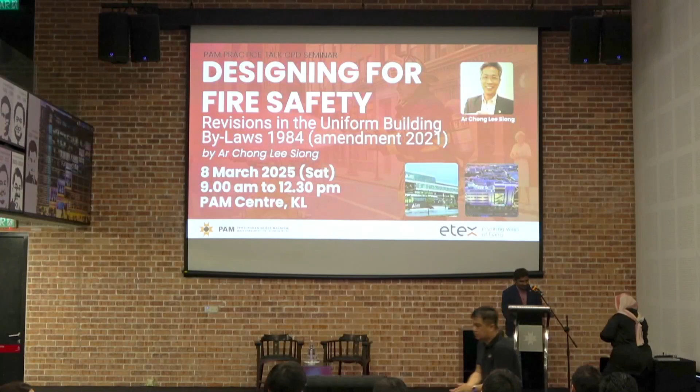Thank you, Azim. Okay, this is always a bit too tall for me. Okay, to start with, to the ladies out there, Happy International Women's Day. To all women attending this event today, thank you for spending your Saturday morning instead of, we can't say celebrating, right? We can't, after Buka Puasa lah maybe. So, but you guys spend your time today in PAM Center, so thank you so much.

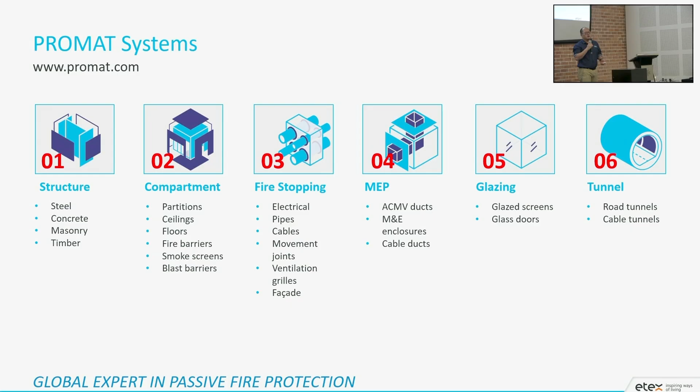Nowadays, steel structure is getting more and more common. We provide protection to the structures, to the concrete, and to the timber as well, although not so much in Malaysia. Then compartmentation - very simple fire rated partition, ceiling, and flooring, not so much, but also on the vertical fire barriers and horizontal fire barriers. Then fire stopping, for all those services passing through the compartments. We also need to treat all these penetration points because when services pass through, it leaves a gap, holes, and so on, so we need to look into it. If not, it will compromise fire protection and fire can easily spread through. And of course, M&E enclosure, ducting, cables, and so on.

So a quick one on the structural protection. When it comes to structural steel protection, we have different technology, different protection methods, from intumescent paint to the vermiculite spray and also board encasement. Each of these comes with their own pros and cons, depending on the project requirement, what is required, then we will propose accordingly.

Intumescent paint basically is up to 3 hours fire rating. It's the most aesthetic one, it's thin and easy to apply. Then vermiculite basically is the most economical option, ideal for large areas, but the surface is a bit textured. If you have time later on, you can visit our booth outside and see the difference between the board encasement, the vermiculite spray, and the intumescent paint.

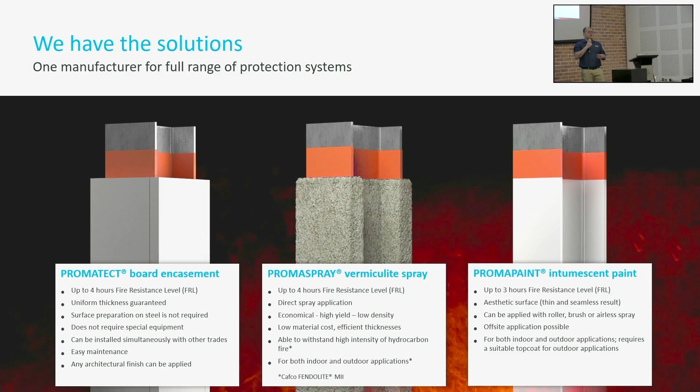In terms of the board encasement, it requires less skilled workers because the board is already pre-manufactured. It comes with uniform thickness. You can just cut, clad, and in terms of decoration, it can perfectly match the adjacent material.

And the last one, on the far right, is the intumescent paint. It basically maintains the steel look. So for those where aesthetic is critical, where you need to maintain the steel look, intumescent paint is the preferred option.

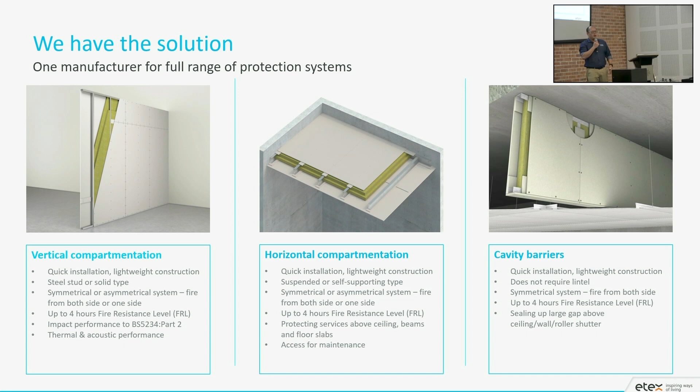So coming into the compartmentation format, we basically offer vertical and horizontal separation - vertical compartmentation, horizontal compartmentation, and also cavity barriers. In terms of the vertical separation for vertical compartmentation, we have different types of design, depending on the project requirement, what is needed, and then we propose accordingly.

From very general, which is very common - steel stud partition, where we build a steel stud framing, put in the mineral wool infill, and clad with fire protective board on both sides. So it's a symmetrical design where you protect against fire from both sides. The fire protection rating is up to 4 hours.

Then other than that, we also have the solid partition, which is a slim design, for when you require one side installation. By having 50mm thickness, it can fulfill 2 hours integrity and also insulation criteria. So it's much slimmer compared to the common steel stud partition.

And of course we have this high performance Durasteel fire and blast wall. It comes with up to 4 hours fire rating, and at the same time it also provides blast resistance up to 2 bar. So for those critical areas where you want to protect critical infrastructure, equipment, and so on, this is basically the preference for that.

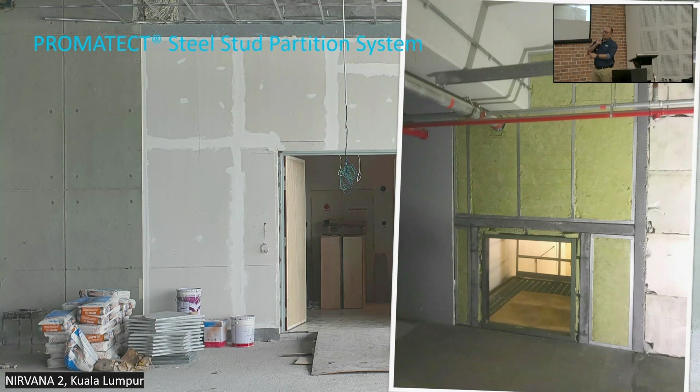So Nirvana for the lift lobby with the steel stud partition - basically it's just a steel stud with mineral infill, then clad with fire protective board, and solid partitions. You can see how narrow the space is, where you can only install from one side. This one is actually for 1 hour fire rating. With 35mm you can achieve 1 hour, 50mm for 2 hours, and 75mm for 4 hours.

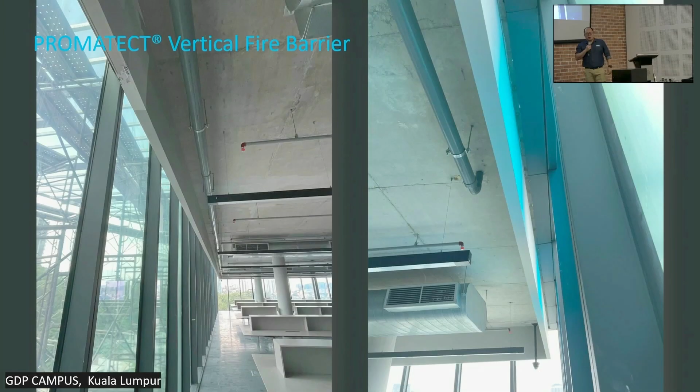Of course, I'm not sure if there's any GDP architect here. Thanks for the support. So this is actually the vertical fire barrier for the GDP campus. This one basically is to tackle bylaw 149 for the fire barrier along the building perimeters.

Then when it comes to horizontal compartmentation, we also have various designs, from the very common suspended ceiling where you need to have the suspended framing fixed to the soffit or to the structural beams. Normally this design is to protect from fire from below. It's an asymmetrical design, but it's ideal for a large ceiling area because there is no limitation on the ceiling span.

Then we also have another system called self-supporting ceiling. It by itself is self-supported. So normally when you have a big, tall floor-to-ceiling height, then you want to subdivide to protect from fire from above and below. So normally when services are passing through and you want to protect them, for example in the lobby, this is the ideal solution where it's fixed from wall to wall.

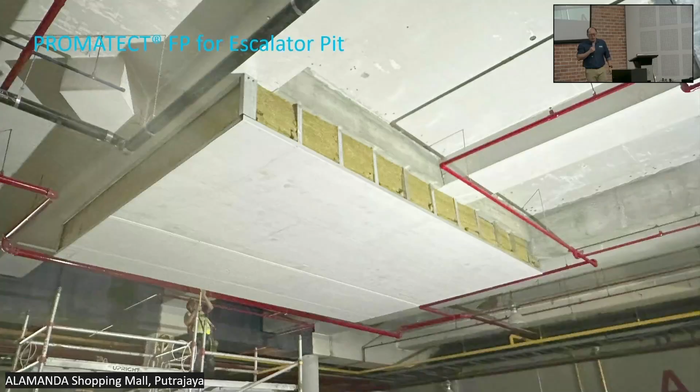So it comes to the fire stopping part. Fire stopping, although not so relevant to architects, is also part of the scope in terms of passive. So I will touch a bit on that. Depending on what kind of services, the type of cables, the type of pipe material, whether it's metal or plastic, the type of plastic, we have different solutions and treatments. So for linear joints, penetration seals, and so on, depending on the requirements, whether you want a permanent fix or temporary fix.

And I would like to take some time to share on this IMC box. It is for cable penetrations. Normally, the traditional way is you need to remove the fire stopping in order to add or remove cables for retrofitting. But with this system, you don't need to remove the fire stopping, and you can just add or remove the cable. It comes with a pipe sleeve, and inside there are flaps where you can insert or remove the cables. If you are interested, we also have a sample out there. You can have a look at that.

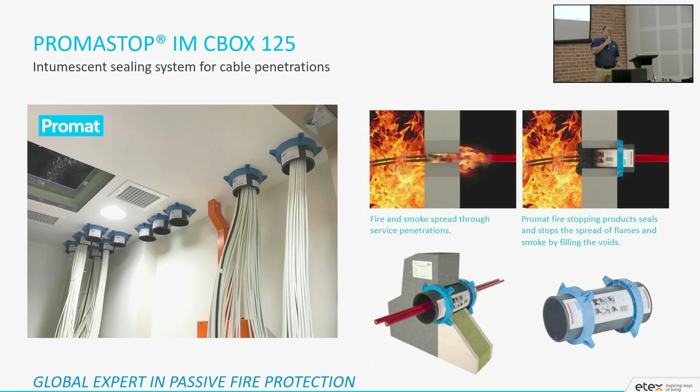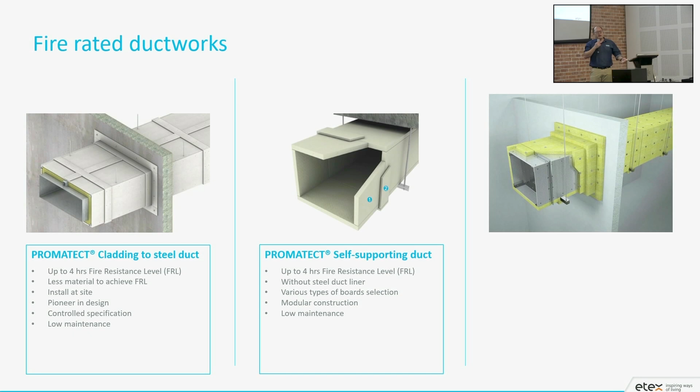So the last part would be on the M&E protection enclosure. Same, we have different types of design. Either we clad the steel duct, or we build the duct itself without any steel liner, just with our fire protective board.

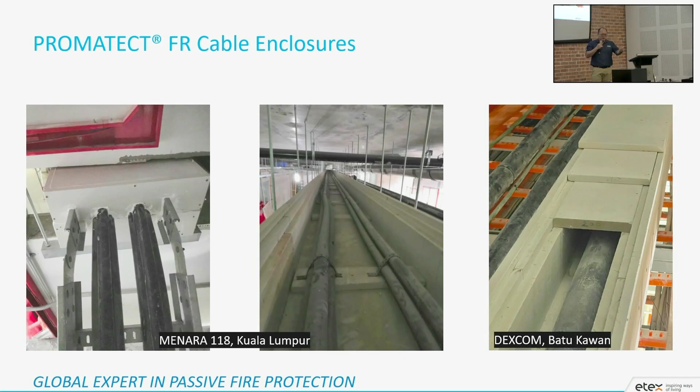Of course, when it comes to a critical service, some of the services when you need to protect, to maintain the fire compartment, we have that solution as well. For example, for cable enclosure, for Menara 118, for DEXCOM, this is the project reference. And yeah, for PayNet, a Durasteel cable enclosure.

We will now proceed with the paper presentation, but first, please allow me to read out a brief biography of our invited speaker today. Architect Chong Lee Siong holds a Bachelor of Arts in Architecture and a Bachelor in Architecture Honours from Deakin University. He served as a council member of Pertubuhan Akitek Malaysia, PAM, holding key roles such as honorary secretary in the year 2006 to 2007, and vice president from 2007 to 2008, and contributed to various committees, including CPD and building standards. An expert in fire safety engineering, he played a role in drafting the Uniform Building Bylaws 2012 and co-authored the Guide to Fire Protection in Malaysia. He has lectured at multiple universities and examined architecture programs.

Thank you so much. Okay. I'll be using this mic, huh? Yeah. Okay, thank you. No, I think it should be all right. All right. Thank you and good morning.

I apologize. I've actually changed the title of the talk today. What's happened is that the original title that I'm meant to deliver is supposed to be on the revisions in the UBBL 2021, highlighting it. But I'm sure some of you may have already gone through a few of my previous sessions on the same topic, revisions on the Uniform Building Bylaws 2021, and we realized that 2 hours is not enough. If I'm to go through it, sometimes it takes up 3 days or 4 days, and we'll never ever finish. And if I give an introduction, you'll just raise more questions, and then I won't be able to go home after that because we'll all be crowding around and having an after-seminar session.

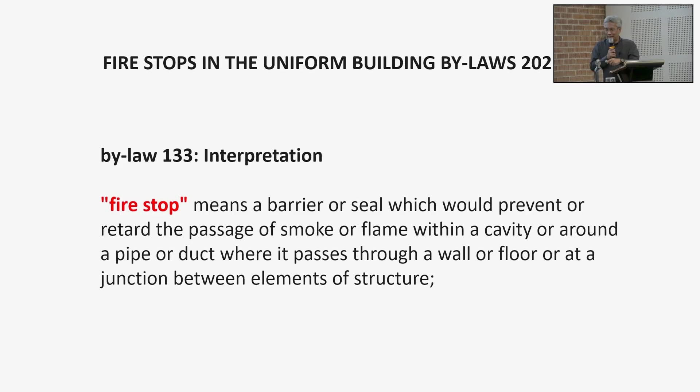So in the Uniform Building Bylaws, Bylaw 133, fire stop means a barrier or seal which would prevent or retard the passage of smoke or flame within the cavity or around a pipe or duct where it passes through the wall or floor at the junction between elements of structure. This is verbatim from the UBBL, so you don't have to take a photograph. It is just a verbatim extraction of the clause on the fire stop.

Okay, where is a fire stop required? UBBL 141 talks about separating walls. No opening shall be made in any separating wall which forms a complete vertical wall separating any building. So generally, no opening shall be formed in a separating wall. But nothing in this bylaw says that you cannot have anything going through a separating wall. It just says it shall have no opening, because a separating wall, by inference, is an element of structure, so it requires fire rating for the prevention of fire spread. But it does allow passage of things through the wall.

On the basis of the prescriptive code, you are not allowed to have a flue pipe going through a separating wall. But if you have a pipe going through, if the pipe is made of combustible material, it shall not be larger than 25 millimeter diameter. So if you have a PVC pipe at 25 mm, when it burns, hopefully the 25 mm hole left behind will not cause too much damage, and maybe the PVC will melt and help seal the gap. But this is purely prescription. The bylaw is not performance-based. It just sets certain limitations.

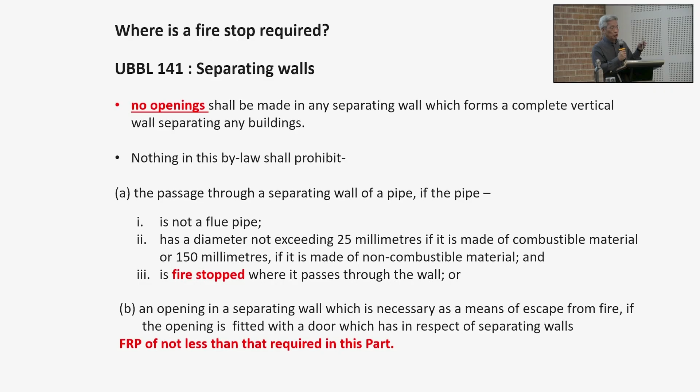So if you put a door leaf in that wall, then obviously the door leaf must be of the same integrity as the wall that you're going through. So that has to be the basis. So take away that half fire rating thingy for doors for now. Just take it away. That one comes in only for certain applications, which I will mention later. Right? So it is always full fire rating, fully in compliance with the integrity that's expected of the wall.

Okay, then still, where is fire stop required? Now we have compartment floors and compartment walls. Just now was separating wall. I do have another session on the difference between party wall, compartment wall, and separating wall, but that's another session. For now, it's separating wall, now compartment walls. These are all references direct to the UBBL.

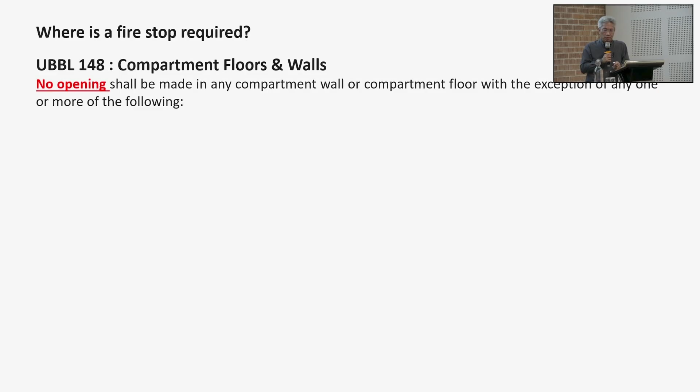No opening shall be made in any compartment wall or compartment floor with the exception of any one or more of the following. An opening for a ventilation duct, other than a duct consisting of a protected shaft, if any space surrounding the duct is fire stopped and the duct is fitted with an automatic fire damper. Right? And again, the fire damper or whatever assembly is going through the wall shall have not less than the required FRP of the wall that you're going through.

That means any opening going through the wall shall not in any way diminish the integrity of the wall. And where a compartment wall forms a junction, etc., then it needs to be fire stopped. In other words, a compartment wall or floor shall function fully as a compartment. Any openings, sleeves, pipes or anything that you're penetrating through shall not be a reason for the wall to have a lesser integrity. Right? Okay, so that is the key criteria of a fire stop.

UBBL 161. So we do actually have a specific clause in the UBBL talking about fire stops, and this is where it is. 161: Any fire stop required by the provisions of this part shall be so formed and positioned as to prevent or retard the passage of flame. That is verbatim. And any fire stop shall, if provided around a pipe or duct or in a cavity, be made of a non-combustible material. Obviously, it has to be non-combustible. Okay. But this is prescriptive code speaking here.

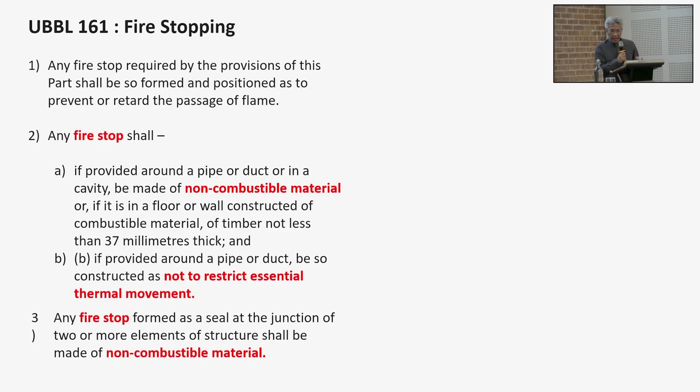So, any fire stop formed as a seal at the junction of two or more elements of structure shall be made of non-combustible materials. Again, it's prescriptive code. Of course, it's understood that it has to be of a non-combustible material.

And any cavity in an element of structure which is continuous through the whole or part of such element and has a surface of combustible material exposed to the cavity lower than class O shall be fire stopped. This little clause over here is probably a little bit redundant now because all of these references are now superseded or taken over by all references to BS 8414.

When we have cladding, when we have cavity on the external walls and all that, the standards of BS 8414 in a way override this already. But this one will still be applicable if you're doing a building that does not necessarily need to be in compliance with BS 8414. Now, this is an element that would still be applicable, right? Fire stopping in cavities, in elements of structure.

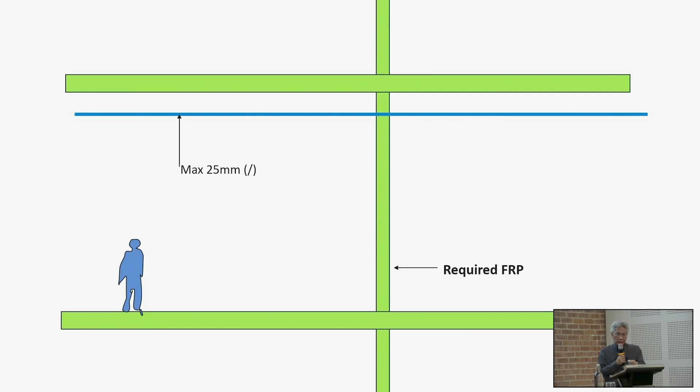Right, so all these are the prescriptions. And again, any junctions forming the compartment shall be fire stopped, similarly. Diagrammatically speaking, this is how we summarize it. If the green elements are the elements of structure that require fire stopping, if you have a combustible pipe going through, maximum is 25 millimeters diameter. And if you have a non-combustible pipe going through, maximum diameter shall be 150 millimeters.

And between the outer surface and the inner surface of the opening, it shall be fire stopped. Right? That means there shall be no air gaps going through. So in this case, what we are saying is that we are relying entirely on the integrity of the pipe going through to prevent the fire from going through the cavity of the pipe.

Right? In the case of the combustible one, you're hoping that 25 mm, if a cavity does occur, should not cause too much trouble. And in the case of a non-combustible pipe, you think that it should be able to last in a fire for the duration that you require it without melting or breaking down.

Now, what if you have a duct? If you have a duct going through, then we need to have the fire stopping on the automatic dampers, or, I've just noticed there's the grill. They've got the intumescent grille. I do not know how we can apply that one yet in terms of its performance and criteria, but it's definitely an interesting element. Because again, fire dampers are specified by our engineers, you see. So we almost have no control.

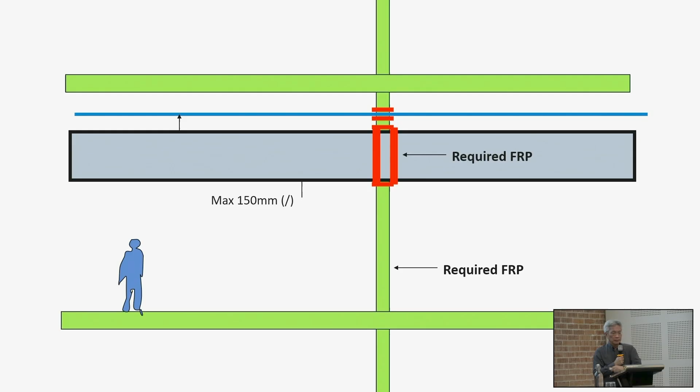But what if this duct happens to be actually your smoke extraction? The last thing you want is for the smoke extraction duct to have the dampers closing. Then you've lost a very critical element of fire safety. So if the duct has to be fully functional at all times, then you can't use dampers. You'll then have to do a full enclosure of the duct over the entire length, fire rating it. Right? So then you can remove the dampers and you have a full fire rating.

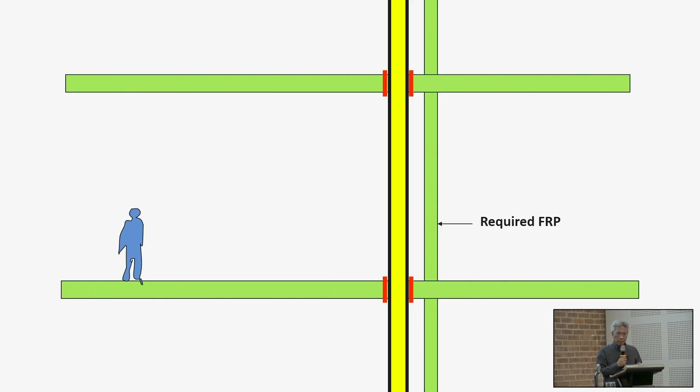Right. So another example, this is for vertical penetration, or rather penetration through horizontal elements. Again, exactly the same thing applies. And if you turn this into a shaft, or you turn it into a ducted riser where you put a door in there, now this is where the half required FRP comes in.

See, the elements of structure, the bylaw is prescriptive, it's very, very clear. Once FRP is prescribed for your building in accordance to size and volume and function and purpose group, it's to be applied to all elements of structure. So all elements of structure is, of course, all your structures, floors, walls, columns, compartment walls, compartment floors, everything that's regarded as an element of structure in the bylaw description.

However, where it is not an element of structure but you require it for fire rating, particularly in a sense like this, you may - it's not that you must - have the FRP reduced to half, and in any case no less than half an hour. So if it's a 1 hour wall, you don't reduce it to less than half an hour. But I'll come to that a bit later.

But generally, the purpose of this is this element - I'm supposed to point it at the screen down there. So this element is not an element of structure, but you are putting it there because you're demarcating... I'm not too sure, am I supposed to point it there or there? Okay.

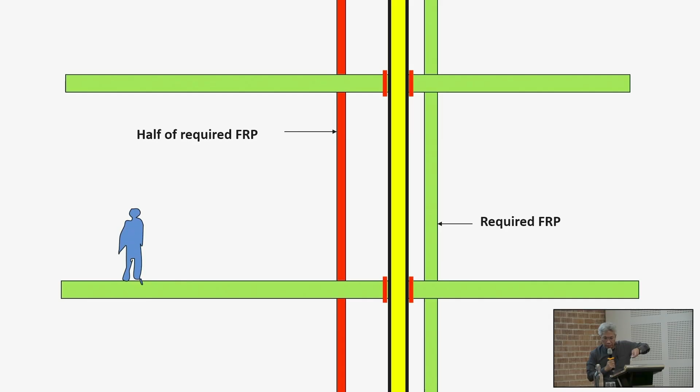Okay, let's see what else I got here. Another illustration: you've got the duct going through between the walls, so you can then have the fire dampers on this one, and the fire dampers may be half of the required FRP. And likewise, if I actually have a door into this protected shaft, that door may be half the required FRP.

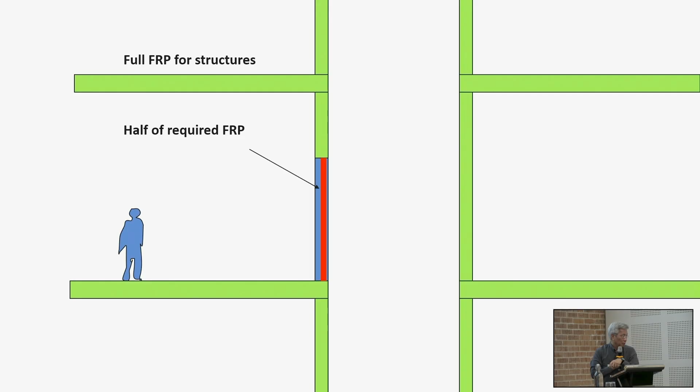The reasoning is quite simple. Generally, the green elements are the elements of structure, so that's already prescribed - we will not want to differentiate it. If it says 2 hours, all the green elements will be 2 hours. However, if you put in a door in a protected shaft, the bylaw never says you shall then have an FRP of a door half that of the structure. No, the bylaw says you may.

The reasoning being that if you have a 2 hour structure like this, and this is a protected shaft, should there be a fire occurring, say, on that lower compartment, you want to stop that fire from spreading into the upper compartment - you're asking for say a 2 hour fire rating. Here, 1 hour fire rating to burn through that door. The fire enters the compartment, and it probably takes another hour to burn through the other door above. That is the rationale.

But that is why the bylaw never says you shall - it says you may. You want to save a few ringgit, you may have a door half the fire rating. And this applies also to protected corridors, protected stairs, storey exits, and all this. You may.

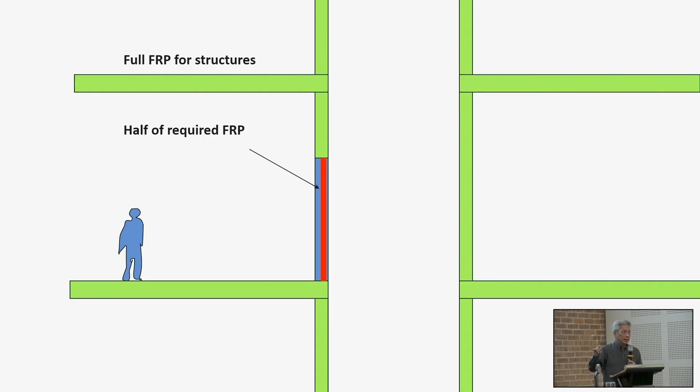Don't take my word for it, but that's just my advice, okay? Because the bylaw never says you shall - it says if you want to save a few ringgit, you may. So this is the application.

So coming back to fire stops, what are the properties required of a fire stop? Again, we go prescription first - sorry, we went through the prescription already. So what does the prescription say? Most of it generalizes in saying the material has to be non-combustible, obviously. Secondly, it has to be of the same integrity - it must provide the same fire integrity as the element that you're going through.

And then the third one is in UBBL 161, it shall not restrict thermal movement. And by that we also imply it shall not restrict physical or mechanical movement.

So now we refer to the standards, MS 1183, on products and materials for fire stopping. The selection of products and materials used for fire stopping should take into account the size and nature of the gap and any anticipated differential movement. Now we are talking. This is Malaysian standards here.

Proprietary fire stopping and sealing systems, including those designed for service penetrations, are available and may be used in a way that they achieve the appropriate level of fire resistance when tested in accordance to BS 476 part 22 or BS EN 1634-1. In cases where minimum differential movement is anticipated and where the gap does not exceed 25mm, the following fire stopping materials may be used without specific test evidence.

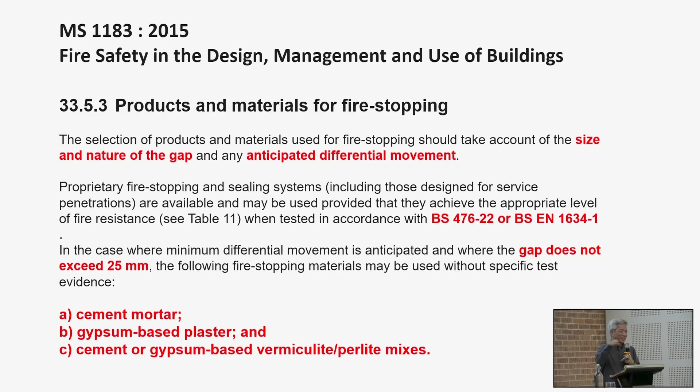The Indonesian workers, they just came by boat the night before. That guy plastering a wall is your fire stop installer. Okay, that's a reality, that's a reality of what's happening.

So if it's non-combustible and deemed to comply, only these three elements.

Then, continuing, to maintain the physical integrity of fire stopping, it should be reinforced with or supported by non-combustible materials or materials of limited combustibility in the following circumstances: in cases where the gap between elements is greater than 100mm, and in any other case where non-rigid or flexible materials are used, i.e. where you need to account for differential movement, thermal movement, or mechanical movement. Then you will need some kind of reinforcement on the fire stopping. So again, these are standards without being too specific.

Yeah, I've said that already. Okay, but what are the specific properties required of a fire stop? We've gone through the UBBL and also we've gone through the mention in MS 1183. So, to summarize, properties required for fire stops: the three elements that are deemed to comply - cement mortar, gypsum-based plaster, and cement or gypsum-based vermiculite perlite mixes.

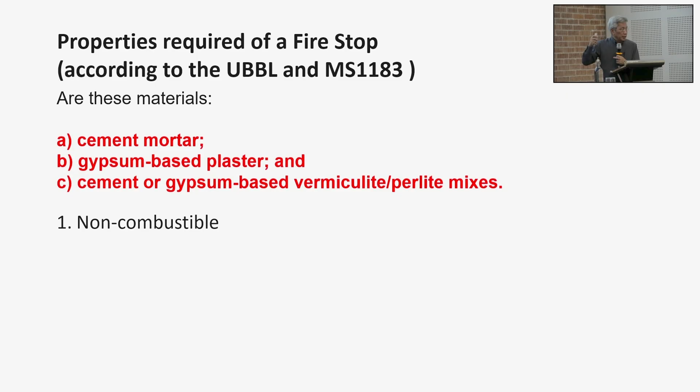Are these materials, now this is the question we're posing to ourselves, are these materials in accordance to the UBBL and MS 1183? We will say yes. Are these materials non-combustible?

Before we answer, now we have to define what in the world is non-combustible. It is important because these are all laws and standards, so we must know the exact definition. So in the UBBL, it talks about non-combustible - if it's non-combustible, deemed to comply. So what is non-combustible? BS 476, fire test on building materials, part 4, non-combustibility test for materials. These are the tests for determining non-combustibility, in this case it's part 4. So part 4 is a very simple test.

Okay, just a note also, BS 476 is kind of ancient, it has survived for, I think, 50-over years already. It has been the backbone of a lot of our specification for fire-related materials in terms of combustibility, fire stops, integrity, stability, insulation, and all that. But however, BS standards at that time when it was configured, the testing samples are all very small. So the results of the standards, of course, they comply if you work it in accordance to how it's specified, but I would say the tests are now very limited.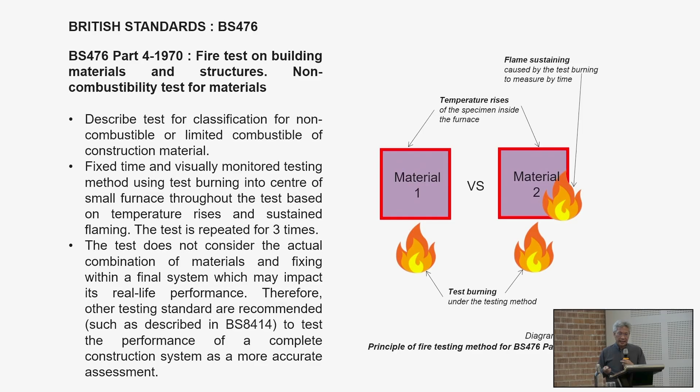In Europe, it's really going to be replaced by EN - I can't remember the code now. But BS 476 is really being replaced already with new European Union, new EN standards. But anyway, just to show you some examples: BS 476, fire testing on materials, part 4, non-combustibility.

You have two samples. One is the base sample, the other is the sample you're trying to test. They're checking the differentiation between the inert base sample and the sample you're testing. They're measuring the flammability, measuring the temperature, and that's really it.

It's almost as if you're taking one material you know as a base that's non-combustible, say a piece of stone, and then testing a piece of paper. You light both of them up - paper burns, wow that's burning, that one's not burning, okay that's non-combustible, this is combustible. That's really it. Now of course the threshold - they have formulas measuring the temperature, the rate of the flames, etc. Then they determine.

So are these materials non-combustible? Because it's already prescribed - if you look into the 7th schedule, yeah, it's already in the UBBL anyway. So are these materials non-combustible? Yep, they are non-combustible. So it fulfills that first criteria.

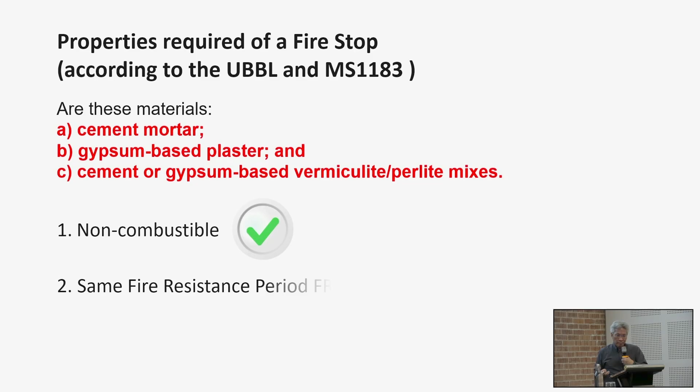Second criteria: same fire resistance period as the wall or floor. Are those materials - cement mortar, gypsum-based plaster, and cement or gypsum-based vermiculite - after you've stuffed it into the opening, would it give you the same fire resistance period as required of the floor or wall it's going through? Well, how do we determine that?

We do not know. Yeah, we do not know. We just know that the material is non-combustible, but I've got a hole in the wall. The wall is, say, a 4-hour rated wall. I stuff this material into the wall, make sure I flush it nicely on both sides. How do I know? We do not know. We actually do not know. How do we determine that?

So then you have to go through fire testing - in this case it's Part 22. BS 476 Part 22: method of determination of the fire resistance of non-load bearing elements of construction. So you have to go through a test like this, as prescribed in BS 476. You erect the element, start the fire on one side, and measure the temperature and the spread of flame. You observe and measure the temperature, and observe whether the flames spread through to the other side. So this is BS 476 Part 22.

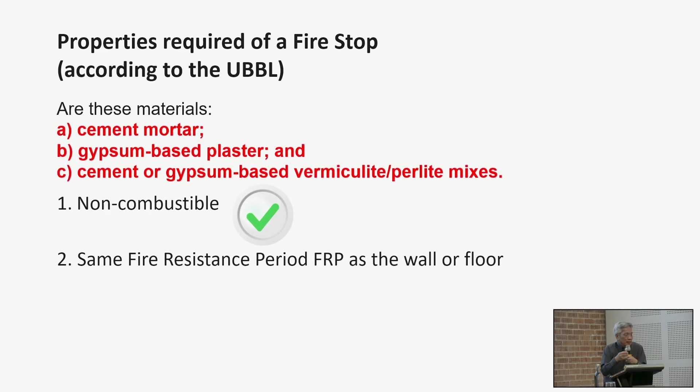The question is this: how do you test gypsum? What was that first - cement mortar. How do you test cement mortar using BS 476 Part 22 to determine the fire rating? You can't. No one has bothered to try it anyway. So on that element - same fire resistance period as a wall or floor - we are not certain.

You are not certain. Number 3: allow for thermal or physical movement. How do you determine if cement mortar, gypsum-based plaster, or cement or gypsum-based vermiculite allows for thermal or physical movement? We do not know. Our plastering on the walls cracks all the time - you expose it to the sun, it starts to have hairline cracks. So how do we know? We do not know. And the thing we all know is that they're very brittle.

They are not mastic, they are not flexible. You touch it a little bit, move a pipe a little bit, it starts to break up and open up. So we do not know that. And structural support for large gaps - if you've got an opening that's really, really large, especially horizontal openings, would your cement mortar hold up? No, you pour it through the hole and it just drops right down to the bottom. So it's not going to work.

So what we're really saying is this: only for very typical situations - small pipe penetrations, a couple of cables going through - cement mortar, gypsum-based plaster, good luck, all right? We can have some confidence, deemed to comply, it will work. But anything more complex than that, you cannot. You have to go further.

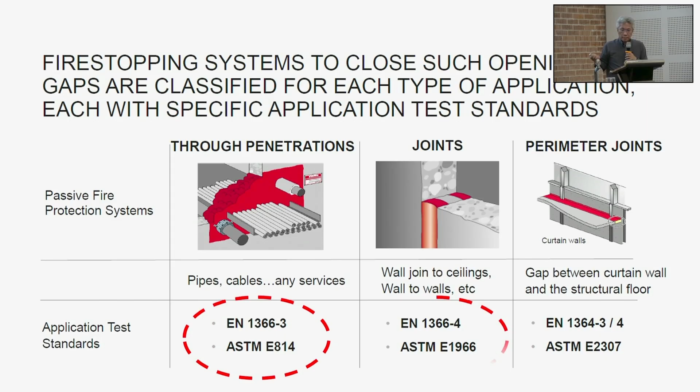So as architects, if you've got situations like this that are beyond the parameters of what's prescribed in the UBBL, we have to go in this direction. You cannot rely on the prescriptive deemed-to-comply approach anymore because it doesn't - it actually doesn't comply. And also on that, and on that.

Right, so let's go through one example. Practical challenges from design to execution. How do we specify fire stops utilizing building information modeling? That's just the way we practice in our office. For the purposes of our very holistic documentation, we use BIM from design to total completion, even to LOD 500, for the purposes of documentation for future maintenance.

And in particular, it works with fire stop. Fire stop is one of the elements, especially on the very complex applications. For example, Chong was mentioning the sleeve, where you can pull the cables in and out all the time, but the sleeve is always there. You're not damaging the sleeve. Right? So that's maintenance, you see. So when it comes to fire stops, we also have to allow for future maintenance, and these are documented.

And using building information modeling, we produce these schedules and data that the owners and building managers can use for tracking the maintenance or the documentation of one of these elements, which is fire stop. So step one, we have the design, of course. We are architects. Everything starts from design. Start with your design first. Get your design correct. Yeah? Don't worry about the bylaws, really.

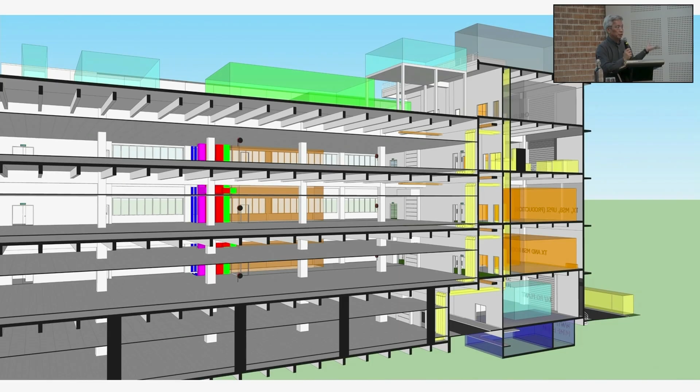So what I do is that I preempt all of that. Now when we design, we are very, very conscious already of what elements have to go in. We put placeholding, so all these funny little transparent boxes here are placeholdings. That means we already pre-allocate where the engineers have to put their compressors, their gensets, the main switchboards and all those items. So we pre-allocate shafts and risers for them, placeholding. It works a lot faster.

So when the engineers take our BIM model, I say, Mr. Engineer, you are the mechanical guy, right? You're the HVAC. Good. You just refer to that layer, do everything you would like to do within that placeholding. Just do not go outside the box. So they're very happy because they don't have to think too much. Straight away, they follow everything within the BIM model. So we put placeholders in conceptual design models on everything. And then as the design develops, the placeholders will be replaced with engineering elements.

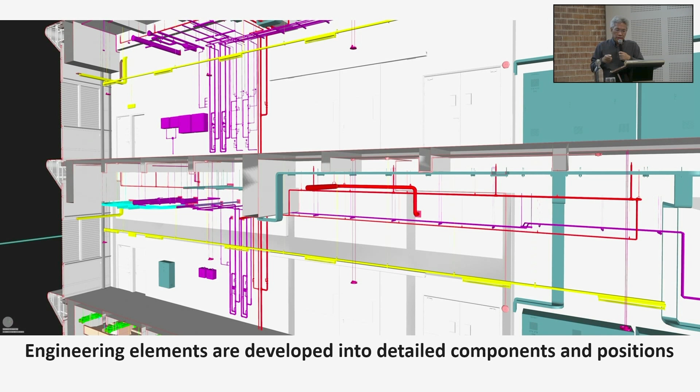So the engineers have to come back. They see the placeholders. Each discipline would then come back with their own diagrammatic drawings. Then from there, we will be able to identify where all the penetrations are. Because we have already done the placeholding, we know where we have allowed the engineers to run their services. And when the engineers come back, we start to identify details. So engineering elements are then developed into detailed components and positions.

Right, so step 2 is the slightly more difficult part. This is the part where I usually say, bye, I've got a very important meeting. Thank you guys, you know how to sort it out, right? Because it does take a lot of effort now. And this is also the part where we have to start engaging with our preferred suppliers. There are many out there, but since today is ProMat, we will say suppliers, for example, ProMat. Okay.

There are actually a lot more, so you just go to the yellow pages. No more yellow pages, yeah.

All right, so this is where we have to specify. So by having the initial BIM model, after the placeholding, when the engineers come back with the details ready, we will start the first round of identification: where are cables going through, where are pipes going through, where are ducts going through and all that. And then from there, with reference to information from suppliers, we can try and identify the first round of components that we will eventually want to be looking at.

Yeah, what are the specifications, what are the design parameters, what are the limitations of all the various materials and all the various systems. Right, then from there, before we go any further, we want to be assured that we are in a position to sign the Borang C3 form. And that would mean that we have to check on the certifications. So this is very, very important. The certifications are very, very precise with Bomba.

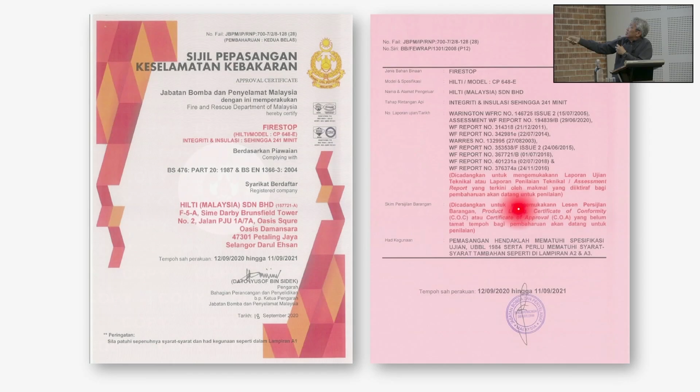For example, first they have to look exactly at what the material is. Then the attachment from this initial certification would be very descriptive of where this material can be installed and in what situations. And it gives you the limitations also. So you have to look at this very, very thoroughly to ensure that whatever you're specifying is actually the correct application for that particular situation.

This one does involve a lot of manual work. AI cannot help us here yet. So yeah, do find a supplier who is friendly, who's willing to sit beside you and guide your hand. And it's hard work. Okay, this is really hard work. Nothing replaces hard work. So, certificate of approval for the use of fire safety products. This is essential. Then be very, very specific as architects, because we are signing our entire career away with this one. So be very, very specific.

Know exactly what's the product name and type so you can specify it correctly. What does it actually look like? What is the test standard? Is the test standard relevant? And who's the manufacturer? Who's the supplier? The fire rating for that particular specimen that you're testing. The test reports. Read through the test reports, because the test reports will contain the parameters of the test, and also the actual results. What do the actual results say?

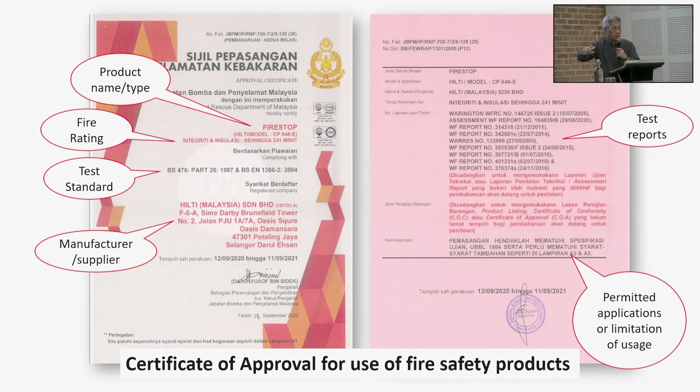Not only just pass or fail, but by reading the results, you'll know the characteristics of the material. And then, very importantly, the permitted applications, or the limitations of the usage. Sometimes they'll say that this material is rated for this. It shall only be applied for this application. It cannot be used for another application, for example. So these are all very, very important.

Then good. Then what is step 3? So we've done the design, we've done the specifications. This is the hard work. This is really, really the hard work now. So the design is the easiest part. After you've done the specification, data collecting, a bit of hard work, but now you really, really have to put it all together to ensure that you track every single thing.

I myself find BIM using the common data environment really works very well for us, because everything is all there. Everybody is working on the same data environment. We are able to cross-check, cross-reference, and ultimately, the final check is always in the BIM model itself. All of us come together, we look at exactly the same BIM model, all the things integrated, we can see where all the clashes are, we know exactly what is being installed, what is being specified. So this is where it helps us a lot.

And we really literally have to schedule every fire stop. So we have to identify every single position. And all of this will be documented in BIM. Every element will have its identity, its specifications, its general description. Yeah, literally we have to go through everything. And then from there, like you can see, there's a lot of variety here already in terms of all the different systems that you have to incorporate. So every single position will have a tag.

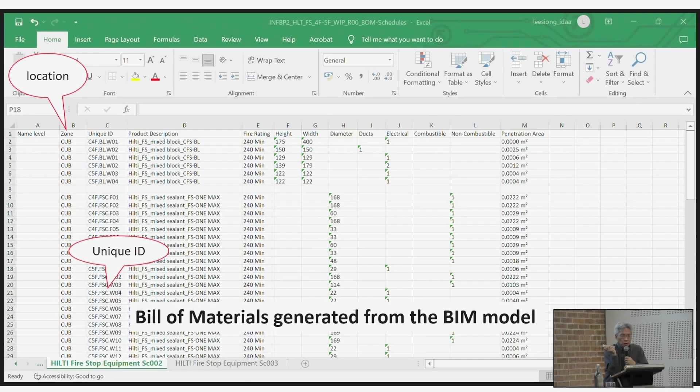And then from there, the bill of materials will be generated automatically if you use the BIM documentation. Then from here, we'll be able to identify the location, the unique ID of every single cluster. If there is more than one fire stop in one location, we actually put it in a cluster, save ourselves a little bit of work. Product name and type, the specified fire rating, the dimensions and size, the types of penetrations, and of course, the quantity surveyor wants that one. They want the final one. So BIM can calculate it very quickly.

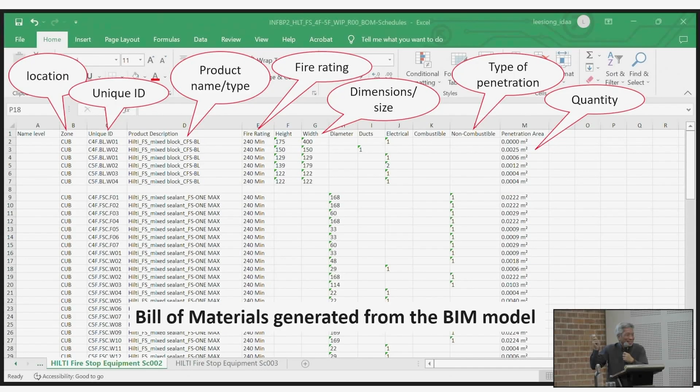And the quantity surveyor is very happy if you get all the documents. Contractors also will love it because they see it, they just rely on that. But make sure it's a BQ contract, because it won't work if it's a lump sum. There'll just be far too much provisions for other things.

So what is step 4 then? That's actual construction. So we don't go to construction until we've actually finished all our hard work, because if you try to specify fire stops during construction, you're already too late. Things will be in an absolute mess. Contractors will say, hey, that's not in my bills, that's not in my scope, and you'll be absolutely too late.

And then some items will require long lead time. Just because I say I want that particular thing, you go to Promat and they'll say, oh, I have to import this from Austria. You take another 5 months before it arrives. So you must do the hard work. Nothing beats hard work. You must do it, you must schedule it, you must design it. And when you go to construction, it is literally the assembly line already. Every component must have its place already, and we can then construct.

So this is where you start checking. As you construct, you have to look at all the different applications. Those are the collars. They're the mixed block for very awkward penetrations. And there's a multiple mixed block for numerous cables. And a lot of this installation, especially when it comes to process utilities, they don't all come in at exactly the same time, for obvious reasons.

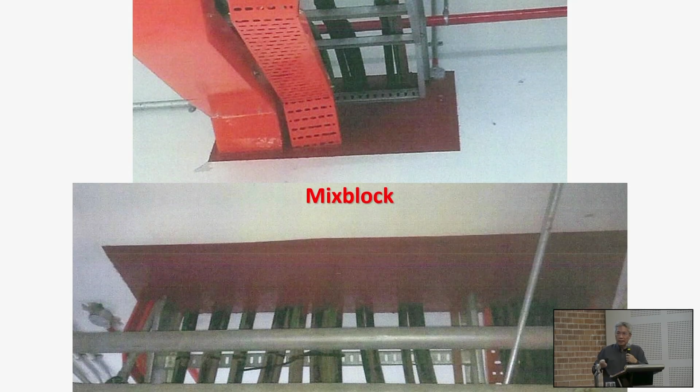So some openings will be left open for a very long time until these guys absolutely finish their work. And some utilities will have to be installed after CCC. Then you say, how can I get my CCC if these guys haven't finished installing and I don't have the fire stop there? So that's where you have certain specifications. For example, we use this thing called mixed block; I think this is maybe a proprietary name, so don't mention mixed block to Promat, they may not know what it is.

Some of these elements are like blocks, they're like plasticine. So if the cables are not there yet, you stuff in the plasticine, you put in the block, you can get your CCC. And then when the guys come and install, they remove the item, put in the cables, and stuff back the plasticine. So that's how it works. That's why you have to specify the correct material for the correct situation, so that you get your CCC.

And then the maintenance people, when they come in the future, and it's also for future additions or upgrades. Process utility changes all the time. So after you get a CCC, the next 2 months someone comes along and says, oh, I need another new pipe coming right through here. So the correct material allows that maintenance to happen. For example, like this one here, that one is actually showing a tray.

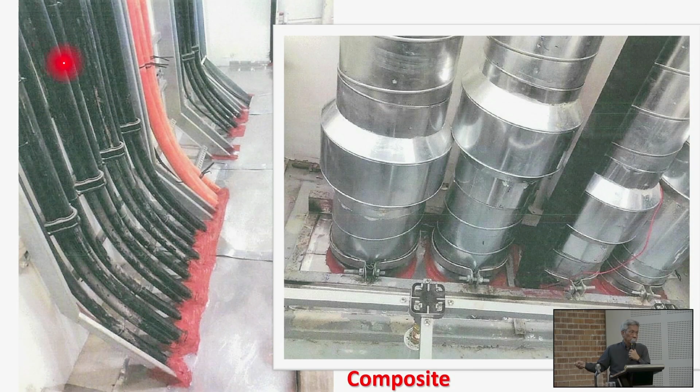This is where the reinforcement, as we mentioned in the Malaysian standards, comes in. This opening is a structural opening. You can see the edge of the slab over here. So this is one giant structural opening because we're allowing cables of any size to come through it. So there's this additional frame that we have to make, and then there are the plates, bottom and top, and then it'll be filled with the intumescent blocks. So the whole thing had to be constructed to be able to support itself and not fall away in the event of a fire.

Exactly. It's meant for that. But the QR code was a bit too late. We finished the building earlier, so we said, okay, temporarily let's manually write some text. But we haven't updated it to QR code yet, because after that, everyone sort of walked away whistling into the sunset. But that's the intention.

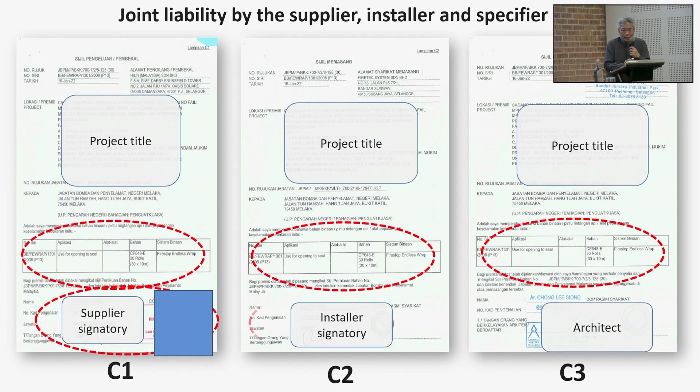So architects sign passive fire stop elements, not the engineer. Of course, if the engineer wants to sign, go ahead. I'm very happy. But we being the principal architect, we really ought to know what the engineer is signing. Right? If you're happy to let the engineer do this job, we ought to know what he is actually doing, because the engineers may not necessarily be doing the right thing either. So ultimately, the responsibility is us. We are the QP, we are the PSP.

And so after certification, what do we do next? We celebrate, okay, for a job well done, take your nice photographs, go for a long holiday, take a break. Don't take too long, we come back, got the next job waiting, and away we go. So, okay, I thank you for this very short sharing. Then after the break, we'll go into the compartments and fire stops. Yeah. Is it fine? Okay, thanks.

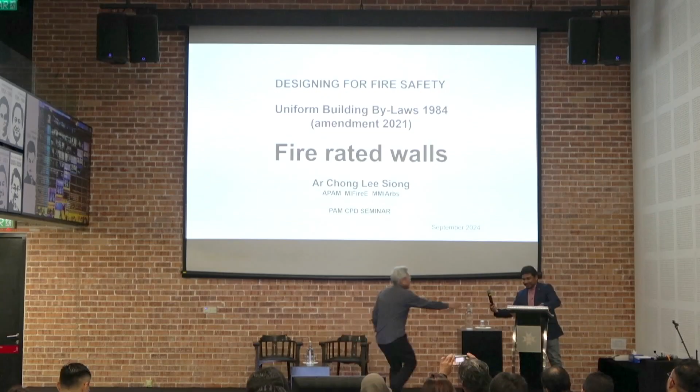So for the second half, we'll still continue with passive fire safety. Okay, this issue is with regards to the use of drywall construction as a fire-rated wall. The UBBL is a prescriptive code. The UBBL says certain things, but there's nothing in the UBBL that specifically excludes the use of drywall constructions in any application. It doesn't do that.

I wouldn't say confusion, but where the first directive was given was actually from Bomba. Way back in 2012, Bomba issued a directive limiting the use of drywall construction as a fire-rated wall. Right, okay, so what we'll do today, we'll just delve into it.

Maybe I'll need the other. Oops. It worked, okay. No, it's not okay. Sorry, I just need the other. I'll use this other one. Thank you.

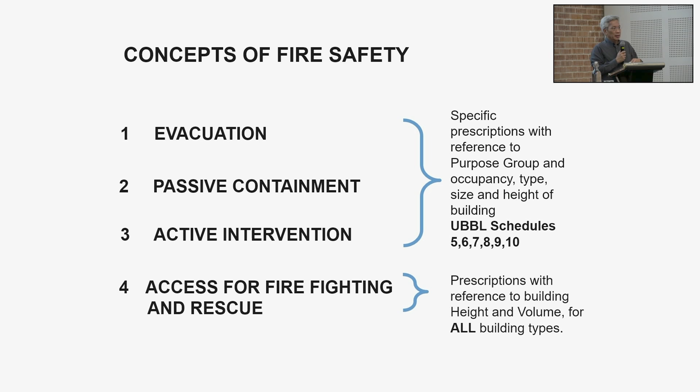Elements related to external, i.e. access for firefighting and rescue, like hydrants, fire appliance access ways, access openings, etc. Those are prescriptions with reference to the height of the building and to the volume for all building types. Just as a very simple illustration, we take it for granted, provision of hydrants. Provision of hydrants is not specific to the building. Every building must have access to a hydrant of some sort. If you don't have a physical hydrant, you must have access to some sort of a body of water that you can use for putting out the fire.

All right. Now, again, under safe evacuation, only one fire at one location at one time, and the primary objective of compartmentation is to contain that one fire in that one location at all times. This is a basic principle that we apply. Going back to safe evacuation, we say only one fire at one location at one time.

This is only a principle in the sense that when we do our design, unless you're designing a building for a very specific risk, like say, if you're fortunate enough to be engaged by the government of the US of A to design the new embassy in Iran, boy, you can't use the UBBL, okay? They will have their own risks that they'll have to make known to you. My building must be able to withstand terrorist attack from the road. My building must be able to withstand arson fire at 5 different locations at one time, etc. So those are known risks that you're designing for. If you're designing a building with hazardous processes, you also have to recognize those special risks.

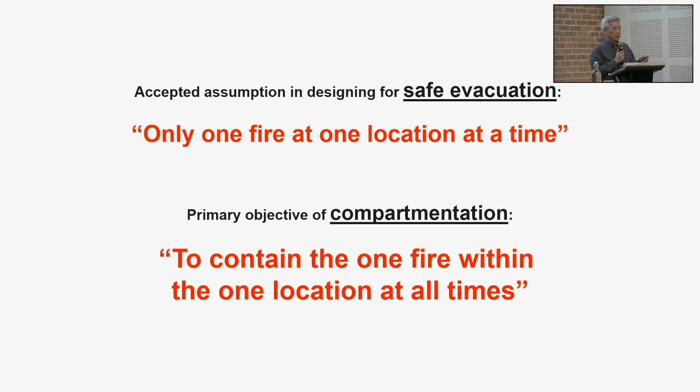Right? Then the primary objective of compartmentation is when that fire occurs, you will have to get people to evacuate the building and compartmentation kicks in. Its purpose is containing that fire within that one location at all times. We want to prevent the fire from spreading. And this is where fire-rated walls or compartmentation comes in. So what are the prescriptions of fire-rated walls in the UBBL 2021?

These are the precise, defined elements in the UBBL that's being picked up that will require a fire rating. All these walls are meant for the purposes of contributing towards compartmentation, keeping the fire in one location at one time. There's party wall, separating wall, compartment wall, external wall, protecting structures, and partitions. All these are prescribed in the UBBL.

So let's look at the definitions first. A party wall, under interpretations, means a wall forming part of a building and used or constructed to be used for separation of adjoining buildings, belonging to different owners maybe, or occupied or constructed or adapted to be occupied by different persons, either constructed over a period of time or maybe abutting a common property, etc. But generally a party wall, as the name implies, is the wall to separate you from a different party, whatever that party means.

In a legal sense, when you're talking from a sense of land ownership, of course, any wall or barrier you put between your building and your neighbor's lot shall be a party wall because it is separating you from your neighbor. So the key word here is separation of adjoining buildings belonging to different owners. That is the definition of a party wall.

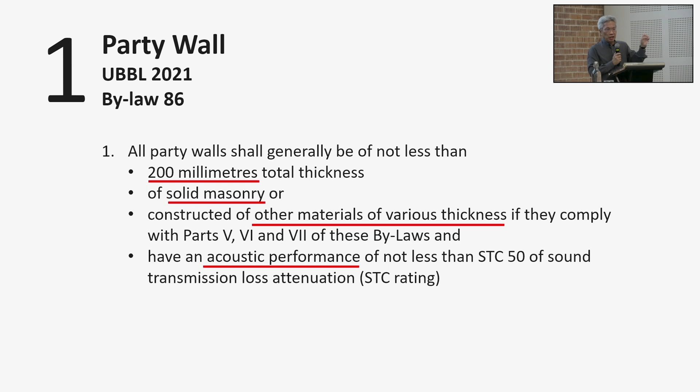Right, so here you see that in the prescription of the UBBL, a party wall first shall have a minimum thickness. It implies that it has to be constructed to a certain degree of solidness. It can be other materials, etc., but first, minimum dimension, minimum thickness of 200 mm. It shall be of a certain density. And thirdly, a very new requirement, it shall have an acoustic performance of no less than STC 50. Okay, so that's a prescription of a party wall. You notice that here, it says nothing about fire rating. This is purely a constructional prescription. It doesn't say anything about the fire performance of this wall.

Such a party wall shall be made of 2 separate skins. It says 'shall', so this becomes the base prescription of a construction of a party wall. Each of the skins shall not be less than 100 millimeters thickness if constructed at a different time.

What in the world is this? When was the last time we actually constructed a party wall on 2 separate occasions? Now all developers build everything in one go. They don't build it in 2 halves anymore. When was the last time in Malaysia you could buy yourself a terrace house lot empty and build your own terrace house? So you build your half of the brick wall first, and then when your neighbor comes in 5 months later, he builds his half. Never. In the Malaysian context, it doesn't apply anymore.

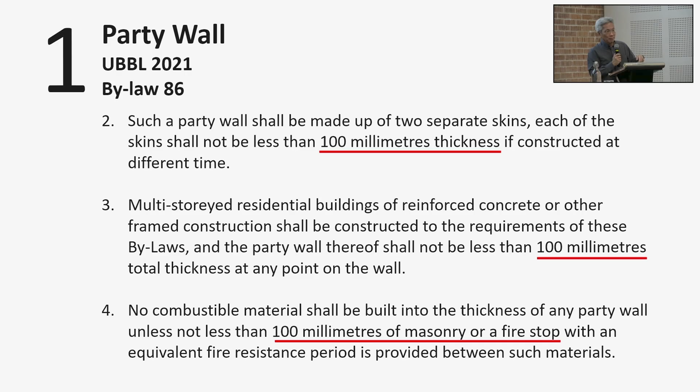You'll have your own 100 mm thick wall on your side of the boundary, and when your neighbor comes along, he builds his wall on his side of the boundary. Next day, when you want to demolish your house and refurbish everything, you demolish your wall on your side without touching the neighbor's wall on his side. So the intention is there, and that is the basic principle of it. A party wall is meant to be something physical that separates you from your neighbor with a certain distance, i.e. the thickness of the wall, and is of a certain density, solidity.

So you can't exactly have a shoji screen acting as a party wall between you and your neighbor, because the bylaws do not allow that. Multi-story residential buildings of reinforced concrete or other frame construction shall be constructed to the requirements of these bylaws, and the party wall thereof shall not be less than 100 millimeters.

So this is the first point — I won't call it a deviation, but this is the first recognition that party walls need not necessarily always be a wall that you build for a landed property. If you're building a multi-story structure now, you have individual strata apartments. Between the apartments, there are different parties, so that is called a party wall.

But in that situation, if the building is built as one single building of homogeneous construction, then your party wall shall not be less than 100 millimeters total thickness at any point on the wall. That means you can vary the wall — a structural column may form part of your party wall, as an example. But nowhere at that point of the wall shall it be less than 100 millimeters thick. That is all it's saying.

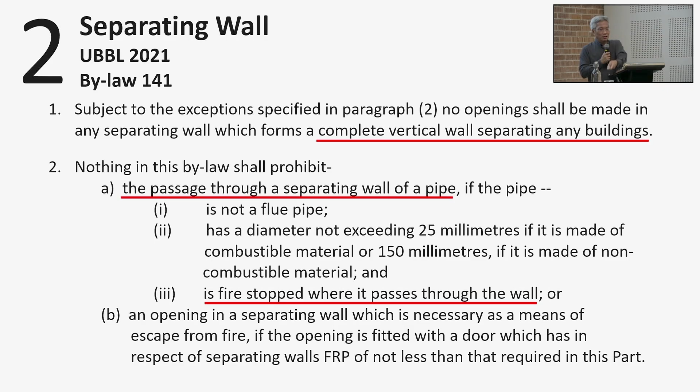So what is it? Let's come back to that a bit later. The other item is the compartment wall. A compartment wall, and by inference the compartment floor, means respectively a wall and a floor which complies with bylaw 148, another reference, and which are provided as such for the purposes of bylaw 136 to divide a building into compartments for any purposes in connection with bylaw 213 and 147.

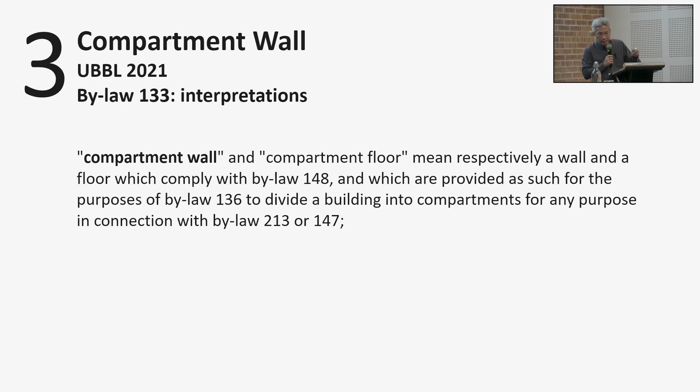Exam questions do have questions like this, so be very quick with your flipping on your bylaws to quickly catch all these references. Okay, compartment wall then really is for the purposes of bylaw 136. So what is a compartment wall?

Any building other than a single-story building for a purpose group specified in the 5th schedule, which has any specified limitations to fire compartment limits. So a compartment wall is a wall that you put in for the purpose of creating fire compartments, for the purposes of limiting the fire compartment to within what is specified in the 5th schedule, or for whatever reason, like separating of purpose groups, separating of hazardous areas and all that.

A compartment wall forms an element. If it's vertical, it's called a compartment wall. If it's horizontal, it's called a compartment floor or a compartment ceiling or compartment soffit. So compartmentation here is any element that forms that envelope that defines the fire volume, the fire compartment volume.

That's quite self-explanatory. And 138, the following floors and walls in buildings shall be constructed as a compartment wall: any floor in the building of a purpose group; any wall or floor separating a flat or a maisonette. Hey, isn't that a separating wall?

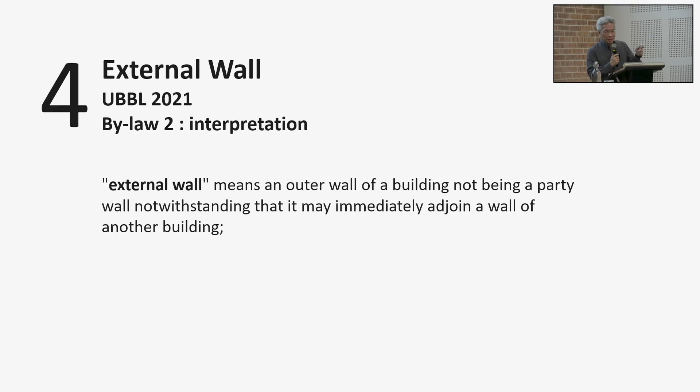Just to add in more confusion, there's also the description of an external wall. So external wall, for obvious reasons, is an external wall. It means an outer wall of a building, not being a party wall, notwithstanding that it may immediately adjoin a wall of another building. So external wall is really the external envelope, any reference to an external envelope. So if any external wall, etc., this one starts to prescribe more into the details. And this is where the sixth schedule comes in.

So by nature, an external wall, the immediate thing is that they say all buildings are elements of structure. If you refer to the definition of elements of structure, it includes external wall. So if I say the building has got a 2-hour fire rating, the external wall is an element of structure, so therefore it's 2-hour fire rating. That's why I said, if you start designing buildings using the bylaw as a guide, we will all end up designing square boxes without windows, because it says the external wall is an element of structure and it must have fire rating.

So how do I do a fire rated window? Okay lah, you do a fire rated door panel, all right? So you open a fire rated door panel, then you can get the light and ventilation in. Now, the application of external wall is this. As a base, it is to be fire rated because it forms the compartment of a building. But in recognition of openings, by functionality, that's where the sixth schedule comes in.

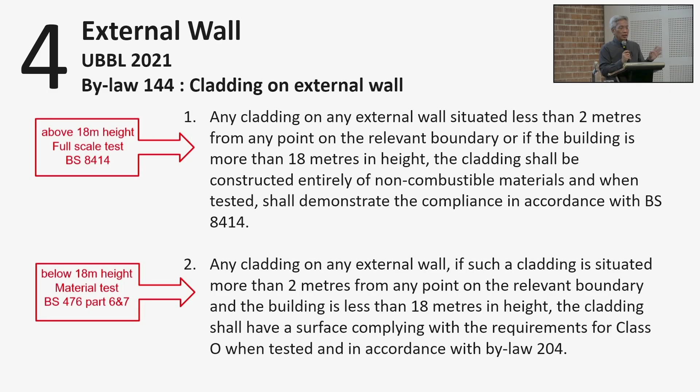If your building is higher than 18 meters, your cladding must go for full-scale BS 8414 testing. If your building is lower than 18 meters, then it must be class O in terms of the surfacing. It is not that all wall cladding above 18 meters, you go for BS 8414, and all wall cladding below 18 meters, you just do class O. No, it's not. If your building is taller than 18 meters, your entire wall cladding has to go for BS 8414. And that would be another 1 hour for us to go through BS 8414.

Then still on external wall, on the fire protection, it will be the horizontal and vertical barriers. Sean Lee did share with us how they construct using drywall construction to provide horizontal and vertical barriers on external walls. Right, this is where it comes in. Okay, then further on, under elements of structure, you've got protecting structures. We talked about protected shafts, like stairways and lifts, protecting structures on any walls and floor which enclose the shaft. Then there'll be partitions and protected corridors and protected lobbies.

So protected corridor here means a corridor separated from the building it serves by partitions having FRP of not less than half hour, and which partitions have all openings therein fitted with fixed lights and self-closing doors, having an FRP of not less than half an hour.

Remember what I was talking about just now? When you use half ratings, and in any case, it shall not be less than half an hour. Okay? On protected corridors and on protected lobbies, lobbies shall be enclosed throughout by partitions having FRP of not less than half hour, and have all openings therein fitted with fixed lights and self-closing doors, having FRP of not less than half an hour.

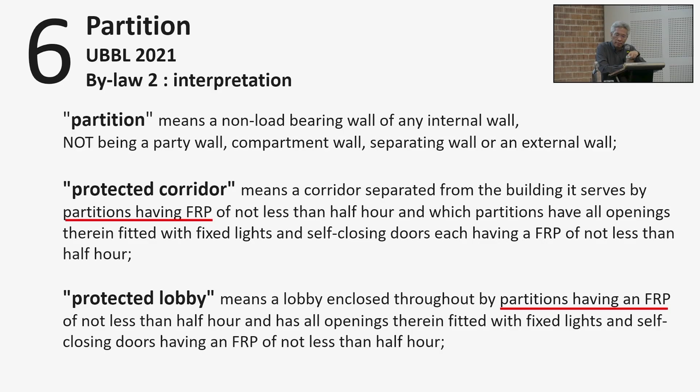Good, then the elements of structure. So once you determine the fire rating of your building, it shall be applied to all elements of structure, and there it is. So it's any structure forming a structural frame, including the floor, external wall, separating wall, compartment wall, structures enclosing a protected shaft, load-bearing walls or load-bearing parts of a wall, and a gallery. A gallery means an elevated walkway or a mezzanine floor. Right? That's called a gallery. So there we have it.

So today we're talking about walls. So the 4 elements are there: external wall, separating wall, compartment wall, and protected shaft. So separating fire risk, bylaw 139. The following areas shall be separated from the other areas of the occupancy with an element of structure of a fire resistance period as specified in the 9th schedule. These are rooms that are deemed hazardous.

Okay, a boiler room, repair shop, storage of hazardous materials, LPG gas storage, transformer rooms, substations, flammable liquid stores, a shaft for electrical risers, ELVs, and even a cold room. The cold room is a very recent insertion, also UBBL 2021. It refers to freezer rooms, cold chain storage, warehouses, and all that. The reason being the refrigerant systems are usually very flammable, for example, ammonia and those elements. So that has been recently inserted.

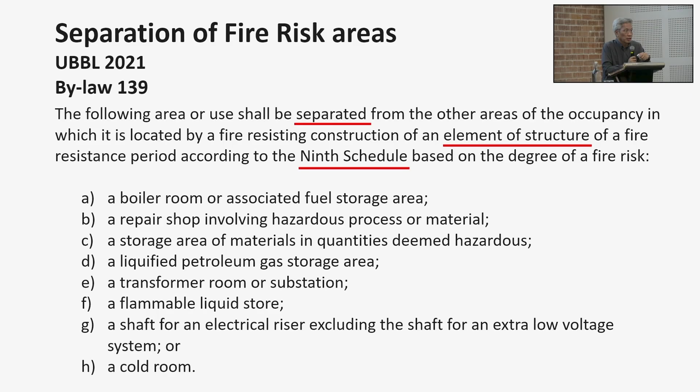So now Bomba has issued a new set of guidelines already that if you are doing cold chain storage, you do have to go back to Bomba HQ as a special purpose building. Good, now we're looking at the fire resistance. So we've determined all the definitions of the different kinds of walls. We have gone through the prescriptions of the methods of construction, and where you get your prescriptions on the fire rating and what are the items regarded as elements of structure. So now fire resistance, you're referring to the 9th schedule. Okay, this is quite simple. We have all gone through that.

Fire resistance for any elements of structure constructed in accordance with specifications given in the 9th schedule, and the notional period of fire resistance for the appropriate building. And test of fire resistance. So earlier this morning we saw what you mean by fire rating. Here we are referring to the same thing. You have to be in accordance with BS 476. And we're talking about a separation wall, compartment wall, and all that. We are talking about just one element, that is the resistance of this material to prevent the fire from spreading from one side of the wall to the other side.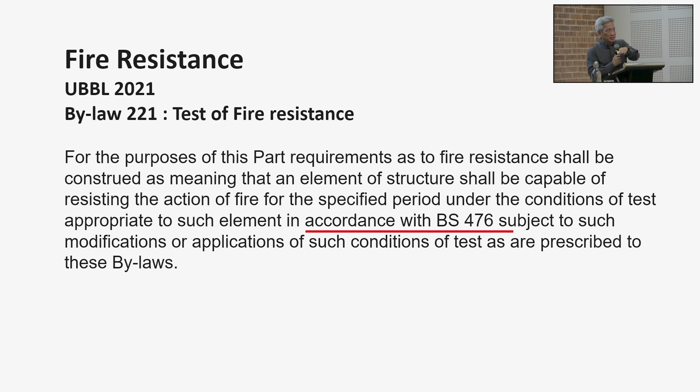So now the big question comes in. Party wall, separating wall, or compartment wall? Everybody gets it confused, especially Bomba. Right? It's actually all in our bylaw, really. You just have to read in between the lines. Bylaw 86, just to reiterate, a party wall means a wall constructed to be used for separating adjoining buildings belonging to different owners. Compartment wall means a wall to divide a building into compartments. A separating wall means a wall which is common to two adjoining buildings. Those are the fire safety requirements. The first one is a constructional requirement. The second one is a fire safety requirement.

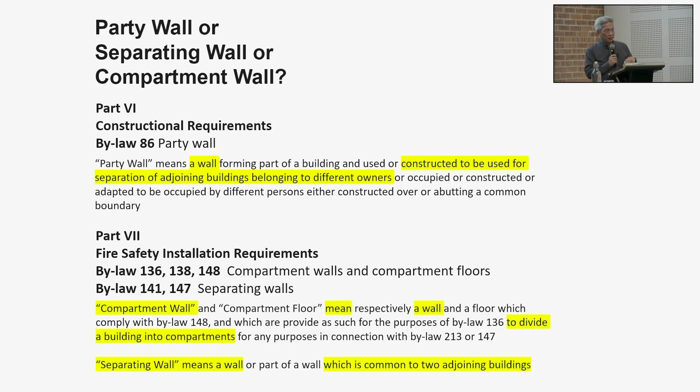So how do you then apply? As an example, a terrace house. A terrace house is the most basic description of a party wall because you're building on land. You've got two different parties. So what is the criteria for a party wall on a landed property? Minimum thickness 200 of solid masonry construction. Then what are the fire safety requirements? It is a separating wall, so it has to be constructed as a separating wall. So therefore, a party wall will first have to be constructed 200 mm minimum, solid masonry of some sort, or any other material with different layers, provided that you don't have any combustible materials in at least minimum 100 mm thickness of the wall.

Right? Correct? Good. And then as a separating wall, what do you have to do as a separating wall? You have to fire stop. If you have any pipes and flues crossing, you have to do all the fire stopping, specifically for a separating wall. If you've got a roof, what do you do? You bring it 225 mm minimum above the roof. Okay, so that's how we read it.

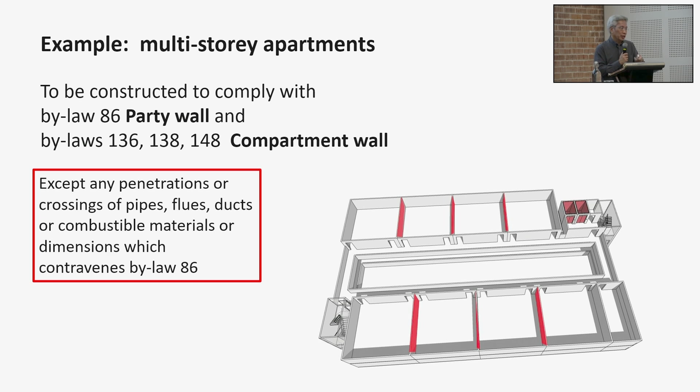If you get married, you decide to break it open, you may, but don't break open where the structures are, because now you're in a single building. So you've got elements of structure forming your party wall. So you can break down the non-load bearing areas, but obviously you can't break down the structures to do the connection. Great. So now let's look at the other application. Adjoining buildings: separating wall to be constructed to comply with bylaw 141 and 147.

One of the applications that we use most for purposes of a separating wall is the measurement of building height. When you have a situation like that, you've got a podium area, and then you've got a tower beside it. If you have a separating wall element there, then you're effectively separating the building height. The building height will be measured on portion A because it's separated by a separating wall from portion B of the building. So the height can be measured separately.

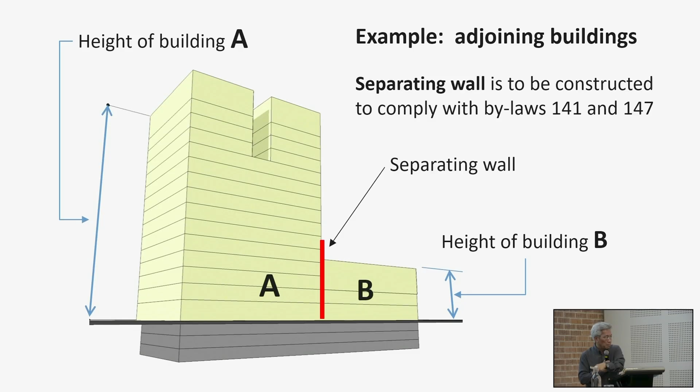What is the implication of this? Well, the first thing is, of course, the application of firefighting shafts, the risers, the fireman's lift. So if A is higher than 18 meters, you have the firefighting shaft. But for portion B, if it's less than 18 meters, you need not have firefighting shafts serving that part of the building. So this is an immediate application.

Good. Now we come to the Bomba Circular, 17 February 2012. That is 13 years ago. It's an arahan. So arahan means just that: you shall comply. It is from the Director General. And this one is on the had kegunaan bagi drywall construction and partition systems. This is verbatim, taken exactly from the guideline, so there's nothing altered. It gives you the jenis dinding, what type of wall construction, an example, and the limitations of its use.

So the first one, dinding proscenium wall. Of course, a proscenium wall is the wall separating the backstage and the front stage of a theater or of a podium. You are allowed to use drywall construction. This one is specifically on the usage of drywall construction and partition systems. So for this one, you may use drywall construction for a proscenium wall. Okay, that's fine. Then let's go on.

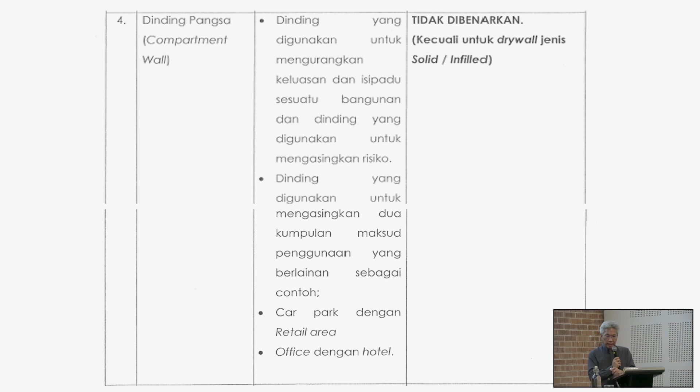Separating wall. Wasn't that a party wall? Never mind. Again, it says you are not allowed to use drywall construction with the exception of drywall construction that is either solid, homogeneous material, or is thoroughly infilled without any cavity. External wall: yes, you may use drywall construction for the external wall, even on the parts that require fire rating.

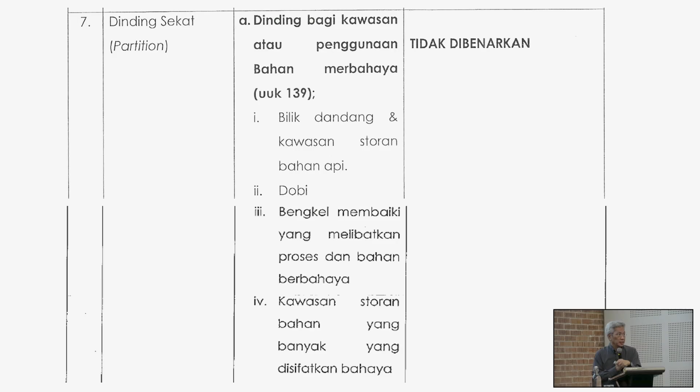For partitions, internal partitioning, what kind of a partition? Partitions for the separation under UBBL 139, partitions for the separation of hazardous goods area, separation of all those listing is exactly as what we saw in the bylaw. It is not allowed. You cannot use drywall construction for the separation of hazardous rooms or hazardous areas. And the entire list is there.

However, partitions for the separation of offices and the little storage areas, you may have an office, you've got a little pantry, or you may have an office and you've got the file storage room, a small cabinet that we put in A4 photocopy paper, whatever. So it's considered lower risk. Yes, you may use drywall partitioning, as mentioned over here. Like the bilik file, the filing room, you may use drywall construction.

And then hotel rooms are technically separating walls, right? Because they're actually separating different tenants. But if you look at it in totality, hotel rooms are first and foremost compartment walls because they are required for the purposes of separating, limiting fire compartments to each of the residency units. So yes, you are allowed, right?

With the condition dengan syarat tiada apa-apa pembukaan dan tiada pendawaian di dalam dinding sebagaimana spesifikasi ujian. In other words, that prescription earlier that you shall, no matter what you do, is minimum 100 millimeter thick, and that 100 millimeter thick has to be non-combustible. So you can chase in cablings on either side and all that, but provided you have minimum 100 millimeter thick of solid infill or solid non-combustible material separating you from your neighbor.

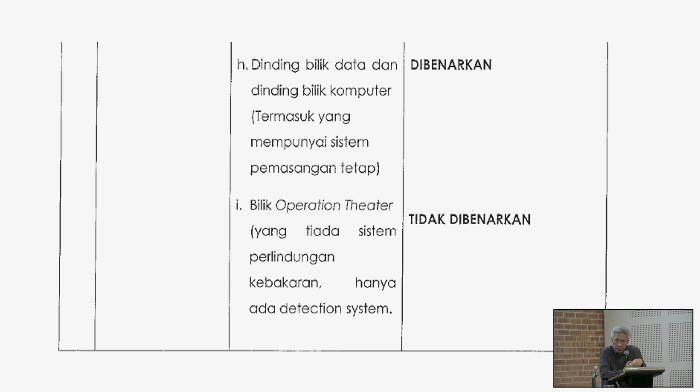And dinding lobby, the common lobbies that are not specifically specified as a firefighting shaft, yes, you may use drywall construction. Data rooms, computer rooms, you are allowed to use drywall construction. Operation theaters for hospitals, you are not allowed to use partitions.

So that is very, very confusing. There's a lot of individual separations, a lot of individual specifications, but I'm attempting to summarize it for you here in terms of what it means. The whole reason why in 2012 Bomba came up with this particular set of arahan is because there were a lot of abuses on the use of drywall as firewalls.

One of the biggest abuses is in, say, factories and warehouses. If you build multi-story warehouses, we're all aware they got compartment limits. Right? Warehouses do have compartment limits, and there is a tendency for developers, especially the speculative developers, not the end users. End users who want their own factory and their own warehouse are very precise with their own requirements and they fully understand how to construct a building.

But it is speculative developers, people who pre-build the warehouse and just sell it to whoever the new occupants are. Fire compartmentation can be very limiting because you're limiting the size of the fire compartment. Then your new buyer who's willing to spend $10 million to buy your factory says, oh yeah, I don't want a party wall there, I want it to be one whole open space.

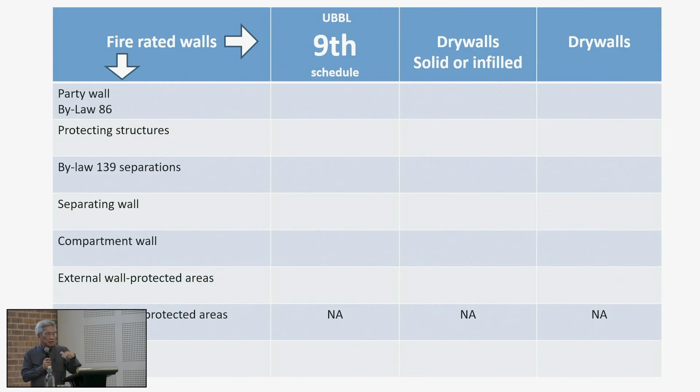So in summary, this is what it means. You're looking at party wall under the definition of Bylaw 86. Then you're looking at protecting structures, Bylaw 139 on separations of hazardous areas, specification of separating wall, compartment wall, external wall, required protected surfaces of external walls, unprotected areas, and partitions. So this is my summary.

So according to the Uniform Building By-Laws, the 9th schedule, all those elements will be prescribed. You refer to the 9th schedule for the required fire rating for each of these elements. Then drywalls, I have to split it into two because where drywalls are allowed to be used, there's also where drywalls are not allowed to be used, with the exception of the drywall being solid or infill. So that means that you may use drywall, solid or infill, for that purpose.

You may use drywall construction provided it's solid and infill for separating walls, compartment walls, external walls, unprotected area not applicable, and partitions. But you may not use drywall construction for the others. And then for just drywalls only, without the specification of solid and infill, you may only use it for external walls and for partitions. All other applications are not allowed.

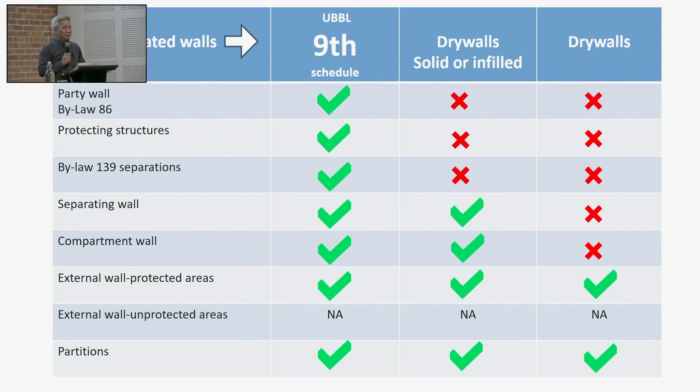Thank you very much, Architect Chong Lee Siong, for sharing such vital knowledge on the UBBL and on all the different types of walls. It's truly eye-opening to understand the different types of elements that we have always been dealing with, to have better clarity on these components.

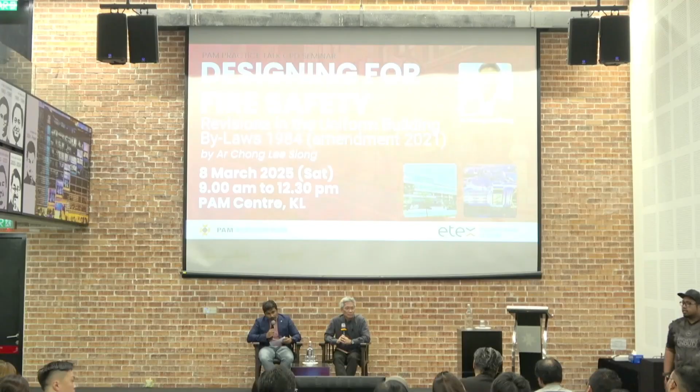Just want to ask about the separating wall for drywall. For the infill, can rock wool insulation be considered as infill? Yes, it can. For the drywall, when it comes to the prescription of solid or infill, yes, it doesn't need to be solid. What is it talking about? It's talking about dense material infill, meaning no air gaps, no cavity per se.

And of course, all of these drywalls, you have to go for testing, BS 476 Part 22. So all of those materials, whichever way you specify it, must be sent for testing and you must get the certification, worked out for STC 50. But STC 50 will not be covered by BS 476 Part 22 - I mean the insulation infill. That one you'll have to have a separate calculation or separate test to prove it.

But because it's under the Majlis, it's not under Bomba. Bomba is not concerned about your STC. As far as I know, has anyone ever experienced a local Majlis asking you to prove that your wall is designed to STC 50? No. Okay, we never had this conversation. But because it's in the bylaw and we are the ones signing it, if nobody asks, we are the ones certifying that it is.

So I'll suggest start talking to some acoustic consultants. A lot of times they don't actually have to do a test, they do a calculation. So it's by prescription, by calculation - they say what's the density of the material, how much plastering you're using, or in the drywall solid infill situation, they can calculate it, same way as they calculate the U value. They will be able to do the calculation for you. And the test is very simple.